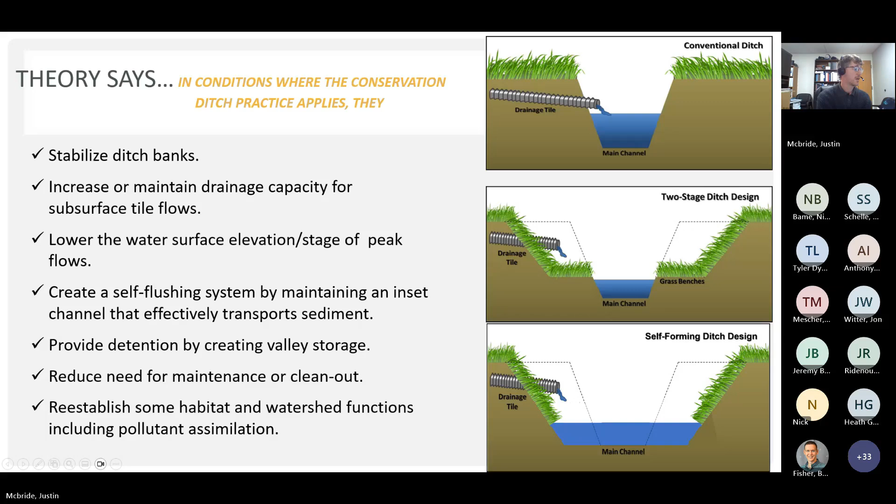This grant in general has really a couple requirements. The last 2 years, and I'll get to this in a second, I guess. I'll stick with the first requirement. The first requirement is the project you submit in the application form. We want to make sure the watershed that the ditch serves is mostly ag land. Now, there's no percentage attached to that, but we're the Department of Agriculture. We help farmers and producers in ag land. We want to make sure we're treating the ag runoff through the system.

Number 2 for the requirement, again, I just went through these. It needs to be either of the two types of conservation ditches, the two-stage or the self-forming ditches. Okay, I'll talk about how those are designed more specifically later on in this webinar, but those have to be in the application. We have to be converting or constructing a ditch that meets those two types of designs. Those are the two big requirements.

The previous 2 years, there was another requirement that stated the finished product would have to be placed on the county drainage maintenance program. We're no longer going to make that an absolute, though we still really want to fund projects that will be on the maintenance program after completion, because we want to have some surety that the funds we use to construct this ditch are going to be on a perpetual maintenance program and be able to take care of any bank failures or odd things going on that need touched up.

We like the ability for the county to go in there and fix them. Again, there should be less fixes structurally over time with these types of ditches compared to the standard trapezoidal type, but if there are those, we want to make sure that they're fixed.

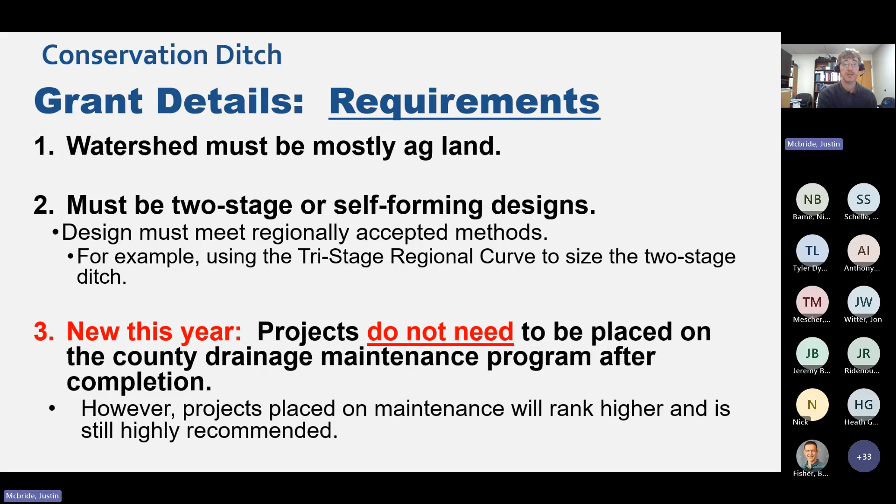So the funding source could change, whether it's going to be the state or the federal or other pools of funding, but that may dictate which projects we fund with the federal funding and the state funding based on whether or not it's going to be placed on the maintenance program. So you don't really have to worry about that. Just know that if you can put it on the maintenance program, please do. If you can't, you can still apply and we can still put it in the application pool to see if we can fund it. That's the big change from this year compared to the previous years.

All right, so to get a little more specific, I talked about the two-stage and the self-forming. The big thing you need to know is that the top width compared to what the traditional ditch was is 2 to 4 times wider than what it was before. So there's obviously a much larger footprint that's typical with these projects when they're installed on a traditional ditch system. Okay, obviously that's a taking of land. There's some acres, and if you go per mile, maybe it's only an acre or two, but there is some amount of land that's now taken out of production because of the installation of a conservation ditch.

And that's the number one impediment, aside from the cost, that we get with putting these out on the landscape, is trying to convince producers and landowners that the taking of the ground is going to be an overall net positive for their farm fields and for their watershed benefits.

But the two-stage, just to drill down a little bit deeper here, is when we widen the top width, we're going to essentially dig out the banks to whatever width the equations require, and we're going to do that down to a certain depth above the design grade. Okay, so there is a certain depth here, 1 to 2 foot or so, that we are going to leave the benches. This will be standard subsoil when you pull the benches back for the first time, and we're going to leave those there, and that acts as the floodplain for the larger storms when it spills out of the center channel.

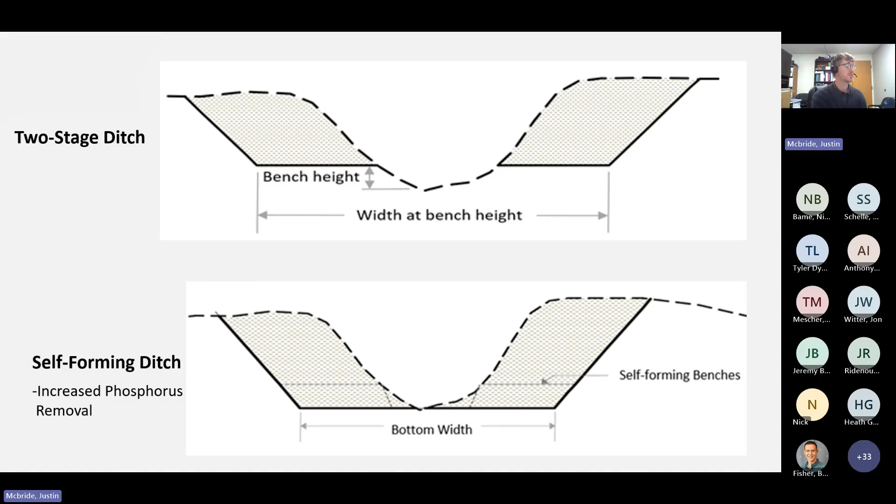Okay, so this grant is going to work the same as it did the last couple of years. We have this application form. Bowden should have sent that out to y'all this morning. And I'll go through it again this year. There's only minor changes in it that deal mostly with the allowance of non-maintained ditches to apply. But I'll go through that again here in a little bit. But what we're asking for is this application form to be turned in with some preliminary information, where it's at, what size it is, and things of that nature.

Okay, so in this process, we are sticking with the only two entities eligible to apply: a county soil and water district or the county engineer staff. All 88 counties are eligible for this program. So this is statewide. I talked a little bit about the Western Basin, which is where we have the phosphorus issue, but this is a practice that is applicable for all water quality issues statewide. So that's why we're going to keep it open statewide like we did last year. But to continue working with the entities who are familiar with ditch projects, we want to stick with the soil and water districts or the county engineer.

That's not to say they can't outsource the design and engineering to a third-party firm. That's totally fine. If some individual landowners are interested, they have to work through one of these two entities to do it. If an organization has some projects that they're interested in getting funded, that's fine. They still have to work through either the districts or the county engineer. So let's see here. After we get the applications, we're going to review them for internal metrics. I'll talk a little bit more on the grant side of that when we get there.

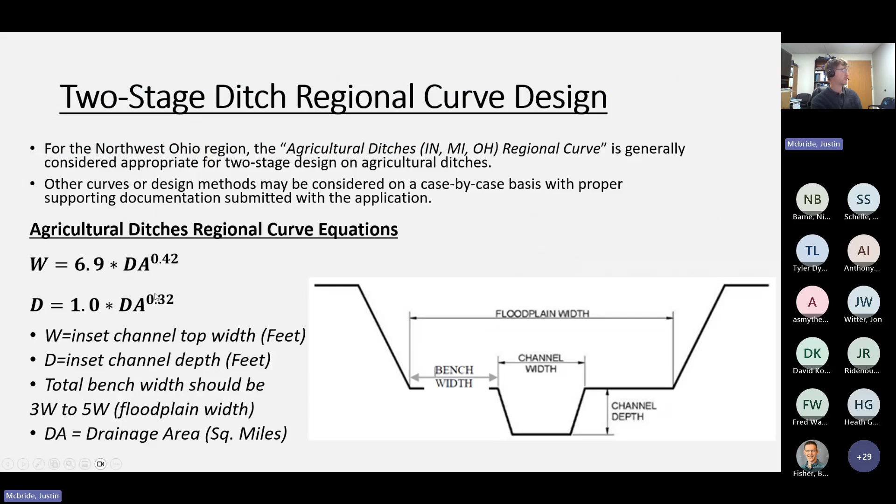The only caveat with these equations, and it's the same drainage area in square miles, same powers, is these three equations were developed assuming a 2-to-1 side slope that comes all the way down to the bottom. Okay, so if you're going to use a self-forming design with a 3-to-1 side slope, let's say, you will have to go back to these original equations in the two-stage ditch and rearrange them so that the cross-sectional area will match a 3-to-1 side slope. If you're struggling with that, call me and I'll do it for you. But that's how these were put together.

The 3-to-1, 4-to-1, 5-to-1 is the flooded width that would have occurred if this was a two-stage ditch. So that's what those are. Those are not side slopes. That's important to understand, is that a 3-to-1 equation is going to give you a smaller bottom width than a 5-to-1. Okay. But as long as you're somewhere between those three, it's going to be sufficient for this program.

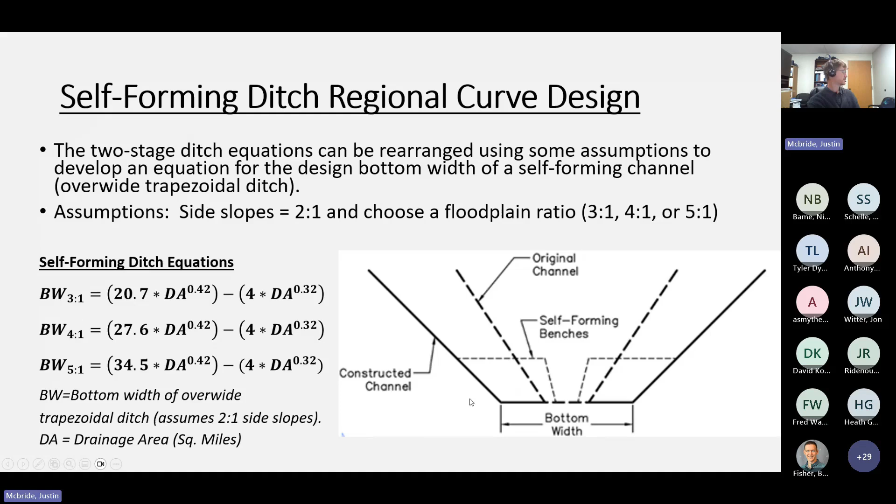All right, let's go through a quick example, and I'm running out a little bit of time here. We got 20 minutes left, but let's assume for the sake of this example, the watershed is 2.5 square miles. The design grade is 0.1%. The existing condition is a standard trapezoidal ditch that was built in the early 1900s or whatever.

It has a design bottom width of 8 feet, a depth of 5 feet, standard side slopes of 2-to-1, and a top width of 28 feet. And if you plug all that into the Manning's equation, the existing capacity of that ditch is 218 CFS. And for that size of a watershed, that 218 CFS of capacity falls somewhere between a QA and QB. This is extremely common in ag ditches.

If you're not familiar with what a QA flow and a QB flow is, it's the standard SCS drainage curve type of equations we use for ditch design. You don't need to know much else than that. If you have some more questions on that, I can answer that offline. But generally, QB is the minimum we would design a ditch for ag purposes in Northwest Ohio, in most of Ohio. And this ditch carries at least that, okay? But it doesn't carry even a 1-year storm or a 2-year storm.

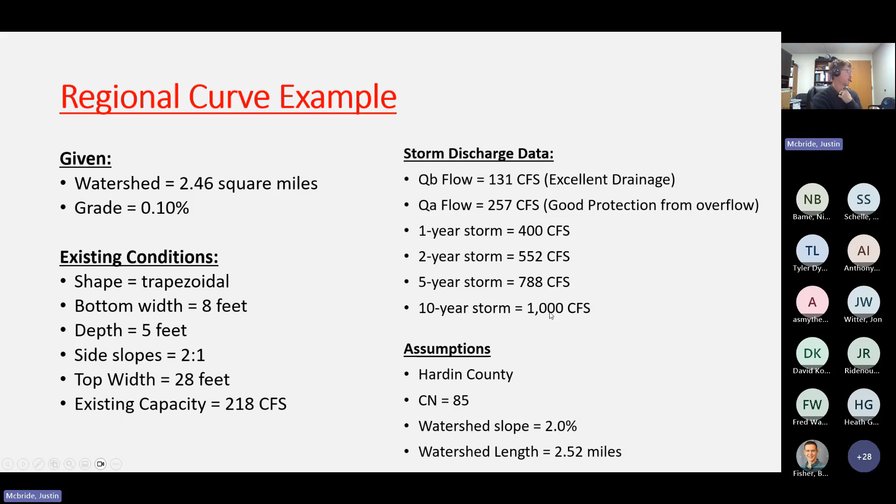All right, so let's go through this example, and let's say we're going to turn that existing ditch into a two-stage ditch. We plug those into those same equations, 6.9 times the drainage area to the power of 0.42, and we get an inset channel top width of 10.1 feet. And from that equation of 1.0 times the drainage area to the power of 0.32, we get a bench height of 1.3 feet. We chose our floodplain width to be a 4-to-1 ratio of the width of the inset channel.

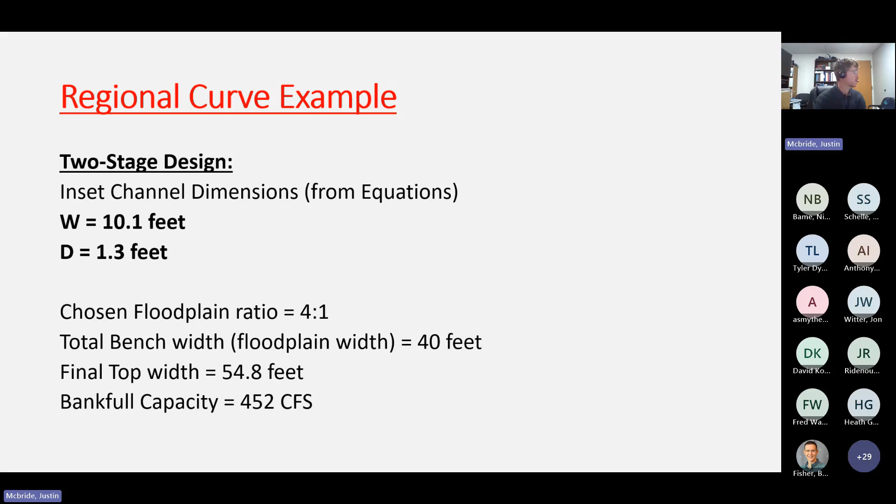So that means 10 times 4 is about 40 feet. Doesn't have to be exact, somewhere in the ballpark's fine. And then with the depth of 5 feet to the grade line that we had in the existing conditions, that gives us an overall top width of about 55 feet. And you plug that into the Manning's equation, and we get a bankfull capacity of 450 CFS. So significantly more than double what the existing condition is, which makes sense. We're taking an existing ditch, we're making it wider, we're increasing the cross-sectional area. That's going to increase the capacity just from that process alone.

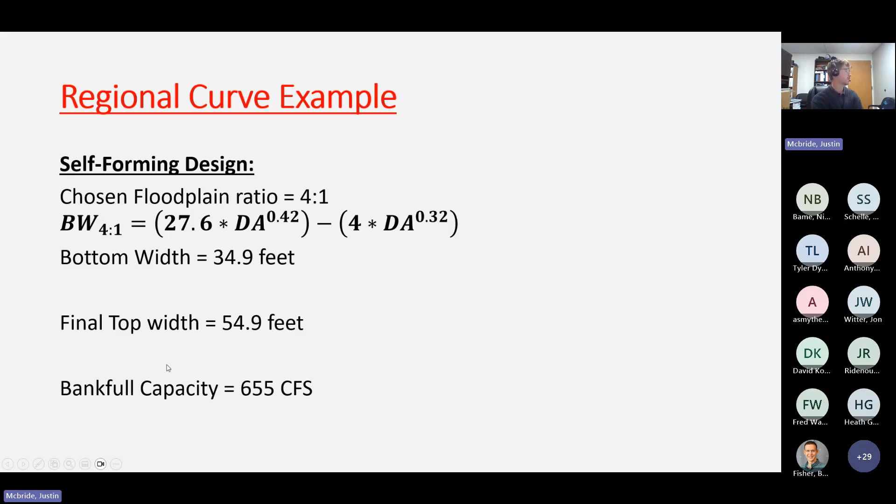If, however, we did the self-forming ditch, we stick with the same 4-to-1 floodplain ratio equation, and we plug everything in. We get a bottom width of 35 feet, and the same exact top width as the two-stage. It's just a little more dirt to dig out because you're going to take the benches out. It's 55 feet top width. And because you have even more cross-sectional area in the self-forming design, you have a bankfull capacity after construction of 655 CFS. So if we list all that out, you can see the comparison from the existing ditch to the two-stage ditch to the self-forming ditch.

Again, the finished top width of both of them is about 55 feet, which is roughly double the top width of the existing, which is pretty good. 2-to-1 is good. Sometimes conservation ditches can be significantly wider than that, but that's not too bad. And you can see the capacity difference, obviously, because we're increasing the cross-sectional area. And because of that increased capacity, we're now able to store at the bankfull flow the Q1 flow for the two-stage and the 3-year storm for the self-forming design.

Okay, and you can see the additional estimated earthwork for those types. Obviously, there's going to be more earthwork for the self-forming because you're taking out the benches, like I said. An important thing to keep in mind is that if you build a self-forming ditch, it's called self-forming for a reason. You're going to self-form those benches over time with sediments. And so over time, this cross-section area will get smaller and go towards more of the two-stage quasi-equilibrium state. And we'll get closer to this capacity, which is still significantly increased from the existing conditions, but it should not stay at this final capacity. Now, if you go back and you dig those benches out, you're going to be back at that 655 CFS capacity.

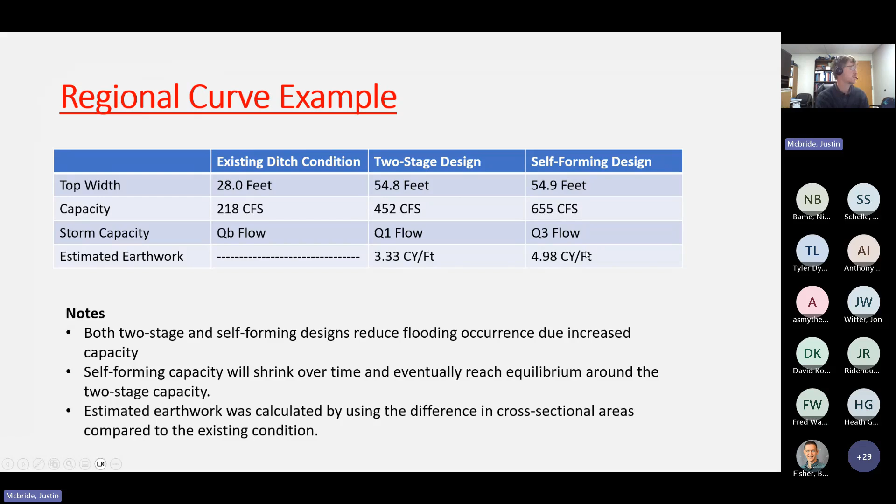And what I said earlier is we would not do that. We would just essentially cut down to this section, and then that would be over wide. So that ultimately would be 12 or 15 feet from that point to that point. And we would not add any fill because the fill would just not be very stable and it'd wash away. So keep that in mind. All right. That's it for the example.